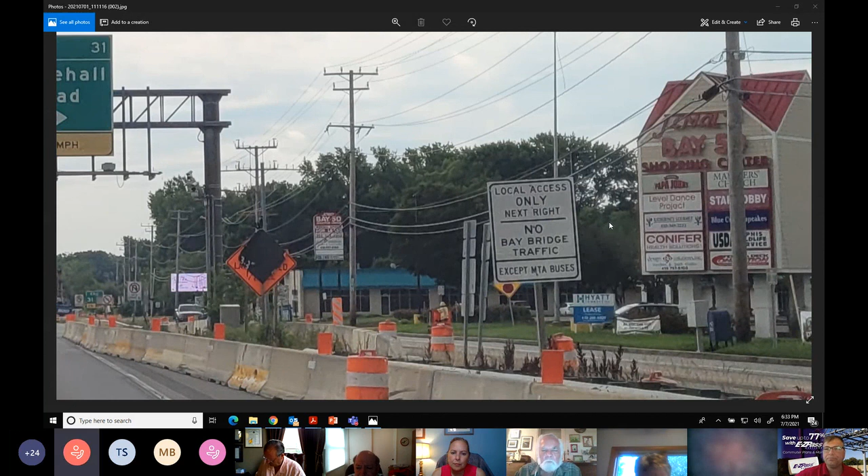Okay, anybody else? Delegate, you have your hand up? Yeah, just adding on to that, it's correct, by the time they get to that signage they're usually already on the side roads. But we previously had the temporary electronic signs before Baydale Drive. We actually had them back to the overpass previously, and I do think that they helped keep people on Route 50.

Okay, yeah, agreed. I do believe that my list still has them out as deployed, so I need to double check with my teams. I still have them out as deployed assets that we activate for our Eastern Shore traffic operations, so those messages should be out. I don't have anything to the contrary that they're not, but I'll double check to make sure those messages are going out.

Thank you. Yes, Will, Jack here. I would say, man, the more you can put out signs the better it is. It just, I hate to say it, kind of bombard the traffic because they want to ignore those things. You know, that little sign on the side of the road, I don't think that has much effect. I think the larger electronic signs, the more there are, the better they are, man. I mean, it's a little bit, but it could help.

They've completed some of the foundations and also completed demolition of the old toll plaza. Upcoming work will be continuing that trenching and boring to complete the work along Whitehall, College Parkway, and US 50. They'll also continue drilling the caissons and pouring the gantry foundations.

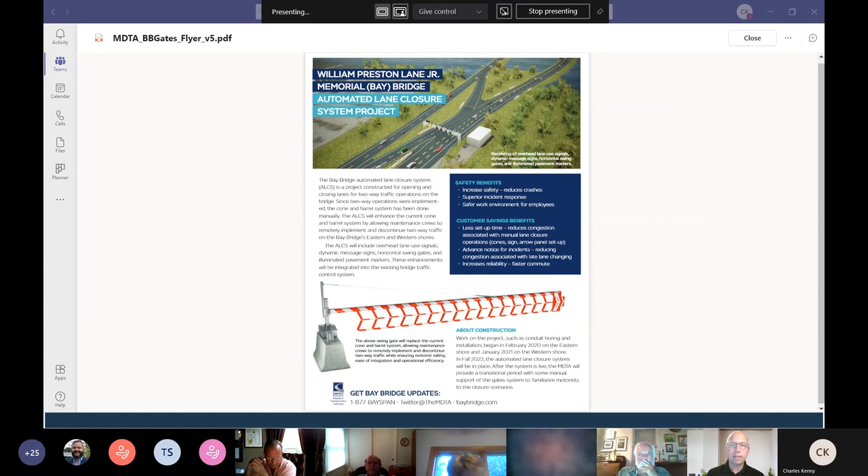That work is utilizing some off-peak lane closures, mostly along US 50, trying to work behind from the shoulder, not trying to have any lane closures. On Whitehall and College Parkway, they are utilizing daytime flagging operations to allow them to perform work in the daytime from those side roads.

Jim, I just wanted to point out we had sent around the Gates flyer that posted to the web under that project, which is shown on the screen as well, on the social media and web pages. We sent it also to the BRAG members today. Right, that's for both 3008 and 3014.

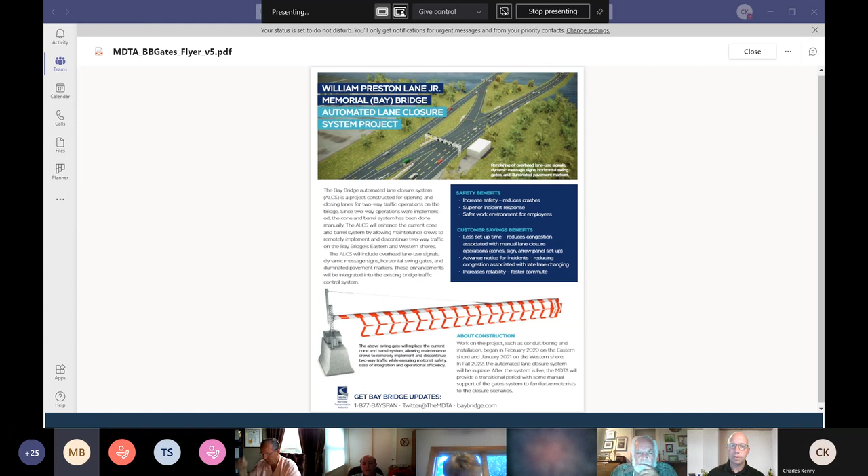Our next project, which is the one project we have in procurement, is BB 3013R. That was the replacement contract for BB 3002. So that's our new on-call contract that will again allow us to address priority defects from our inspection findings. That project is expected to receive notice to proceed this August, so we should have that online soon.

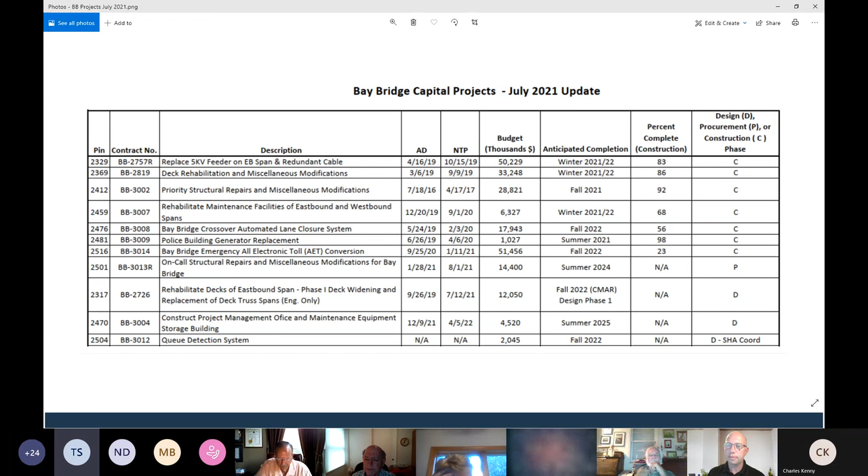Great, thank you very much, Mr. Chair. Appreciate it, and appreciate being able to give an update to the BRAG today on our efforts. MDOT SHA is heavily involved. I'm here for Administrator Tim Smith, who's on leave this week.

We're right in the middle of our Eastern Shore Traffic Operations Program, which deploys our resources heavily on Fridays, Saturdays, and Sundays on the Eastern and Western Shores to proactively patrol with our emergency patrol units, monitor our ITS, our Intelligent Transportation Systems devices, and filter information while working with the Maryland Transportation Authority and other credible sources that are calling in incidents, breakdowns, disabled motorists, lane disrupting incidents when they occur, to alert motorists with traveler information on our overhead signs and our portable changeable message signs, and things that affect traffic flow, and get motorists that are in need of assistance moving along quickly and rapidly.

One of the things we've seen this year is some changes in trends of travel. Just recently, we started noticing some changes in Thursday travels. So we started adding some resources to Thursday afternoons and additional patrols to the US 50 corridor through Annapolis for some of the congestion we've been seeing, in an effort to help mitigate those things when they occur, so that we can be readily prepared with resources and quickly clear and respond to incidents when they occur, and provide that traffic management, detour resources, or assistance when those events occur.

And I'm going to kick things off. I guess, Melissa, will you be projecting the presentation? Okay, I'm going to kick things off, and then Jim Harkness will follow shortly thereafter to give some additional background.

So as several had mentioned during this meeting, this summer has been really challenging with both weekday and weekend periods with simultaneous delays at the Bay Bridge. At the last meeting, we noted that there were some historical traffic analysis available to the public and the BRAG members, including the 2015 life cycle cost analysis, or what's referred to as the LCCA. We wanted to go over some of that to address some of the community concerns about traffic, and we hope it will provide some background on the recent traffic stats and perspectives related to those stats on what the BRAG members and the MDTA should expect in the future based on the prior studies that we've done.

So you'll note on the screen that the life cycle cost analysis that was completed evaluated between Maryland 70 Rowe Boulevard and US 50 301 split. Next slide, please.

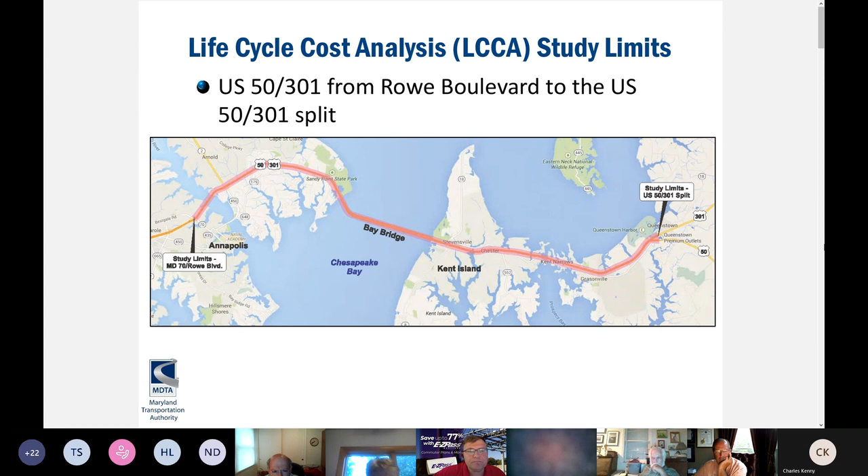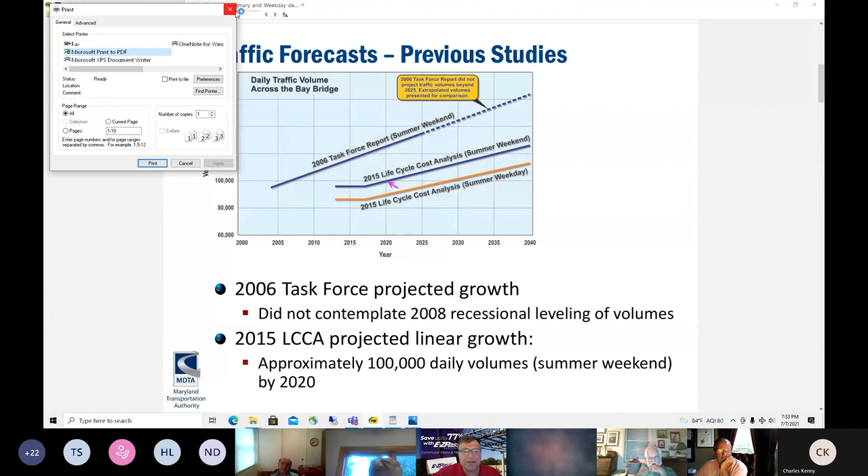So as many of you are aware, there have been a number of studies completed over the years which have evaluated and forecasted the traffic at the Bay Bridges, including over multiple different administrations. The 2006 report projected a linear traffic growth, but it did not contemplate the temporary decline in traffic volumes that we observed during the recession period in the late 2000s. The 2015 LCCA report was based on 2013 traffic data and similarly projected linear growth, but that growth was with a more conservative growth rate and incorporated the recessional traffic impacts that we had experienced. The 2015 report projected daily volumes in the summertime of approximately 100,000 vehicles by 2020.

And obviously with the pandemic, we had lower traffic volumes than that experienced in 2020. But as you'll see in the next few slides, the traffic information in 2021 is kind of right in line with what we expected and had predicted in 2021. So next slide, please.

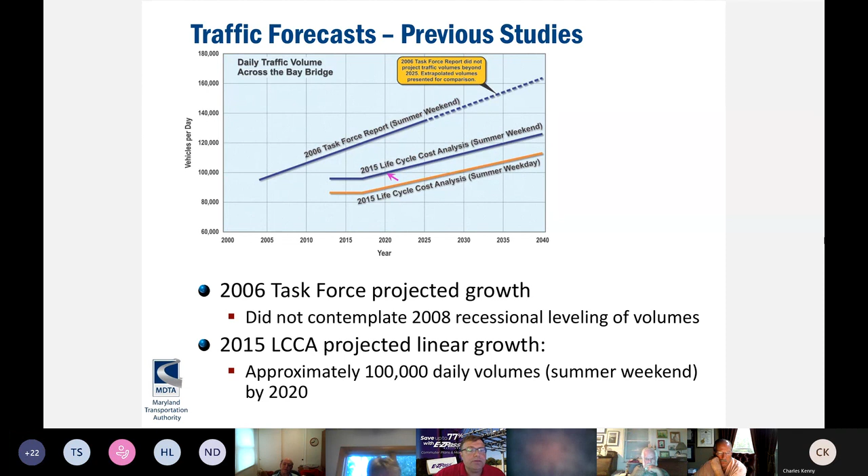I appreciate Mr. Coates' comment earlier today about traffic at the Bay Bridge being difficult for as long as he can remember. That said, we're seeing some really high volumes and in certain cases unprecedented volumes here in 2021. You can see that the 2021 actual volumes for the fourth week of June were frequently the highest we had ever experienced for this week in prior years. Additionally, the total volumes were near that 100,000 vehicles mark that we had predicted in the life cycle cost analysis. Next slide, please.

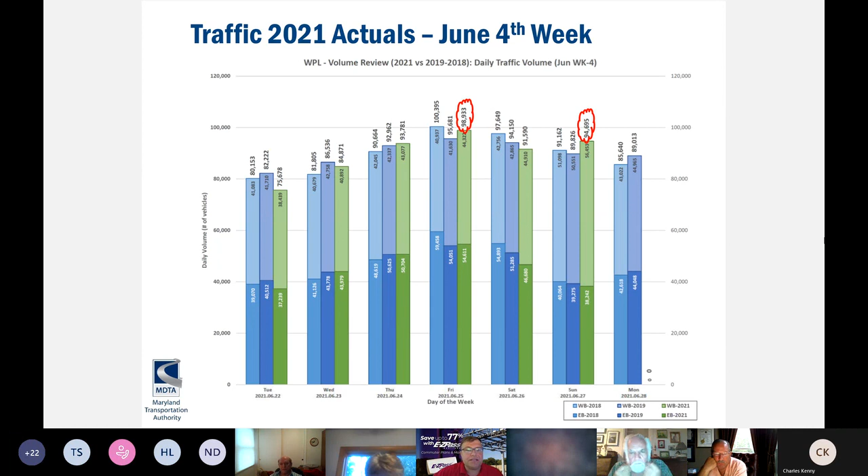We are hearing the community's frustrations with the simultaneous eastbound and westbound delays, with specific calls to alternate the two-way operation for whatever direction favors the delays experienced. However, it's important to note for the BRAG and MDTA that we need your help managing community and motorist expectations, as two-way operations will not adequately manage these simultaneous delays that we are experiencing and will increasingly experience over time. Significant delays during the summer in both directions concurrently will occur.

The traffic operational improvements that we've done and are doing, like the implementation of all electronic tolling and the automated lane closure system, will not address the congestion that is fundamentally caused by inadequate lane capacity on the bridge. There's simply too many cars for the number of lanes.

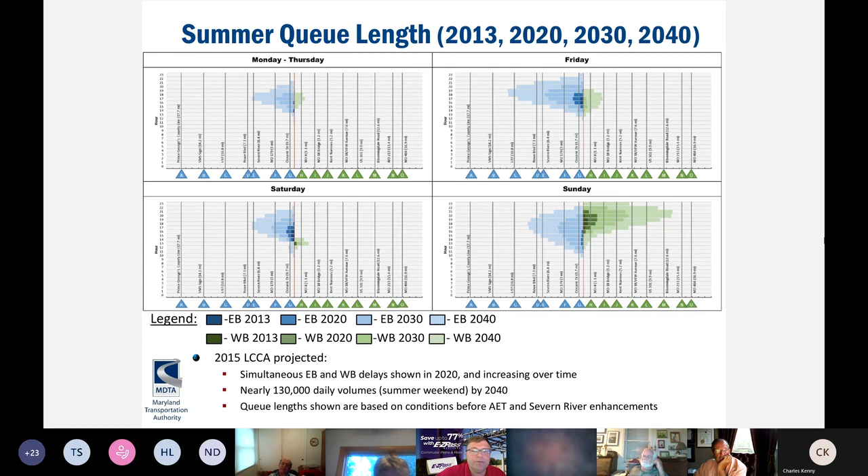I already talked about the lengths of backups we're experiencing and expecting, but it's important to also note that these backups are based on average conditions in the life cycle report. They exclude incidents, inclement weather, construction operations, special events, and holidays. Furthermore, we're seeing the spreading of traffic both during the week and in the fall and spring periods.

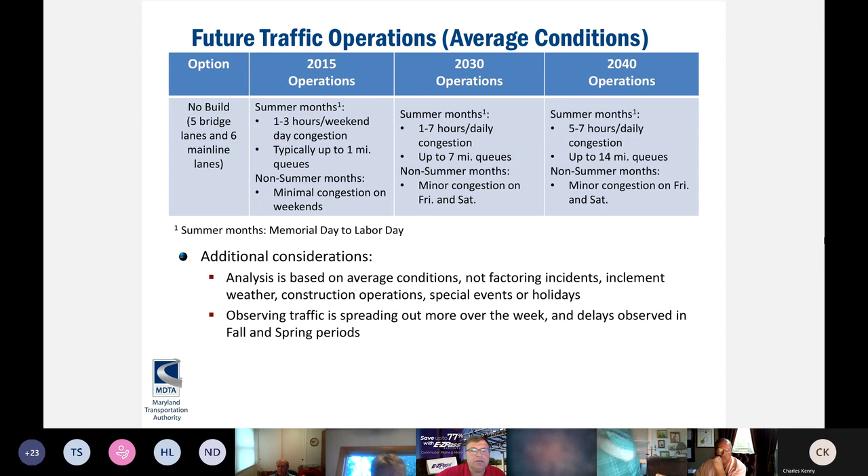Lastly, before I turn it over to Jim Harkness, the life cycle cost analysis projected that there would be major projects needed to keep the existing bridges in service, totaling nearly $3 billion. The existing bridges were originally designed for a 50-year life, with the eastbound bridge nearly 70 years old and the westbound bridge nearly 50 years old. Servicing the maintenance and traffic needs is becoming increasingly challenging as the bridges age beyond their original design intent.

Given the age of the bridges, and to keep them safe and open to traffic, we expect a near constant state of necessary construction. Additionally, the life cycle cost analysis notes that future projects on the existing bridges will likely necessitate partial bridge closures, including during peak periods, and potential long-term lane closures. With community objections to even minor lane reductions and the current shoulder closures, the practical feasibility of more extensive rehabilitation and maintenance projects necessary to extend the bridge life is very uncertain.

It will become increasingly important for the members of the BRAG to help share with the community the realities of the lane capacity inadequacies, as normal and work zone traffic concerns apply increasing demand on the management of the bridge. I'm going to turn it over in a moment to Jim to talk about some of the experiences we've been having during the weekdays, but I'm happy to take any questions on the slides I've presented so far.

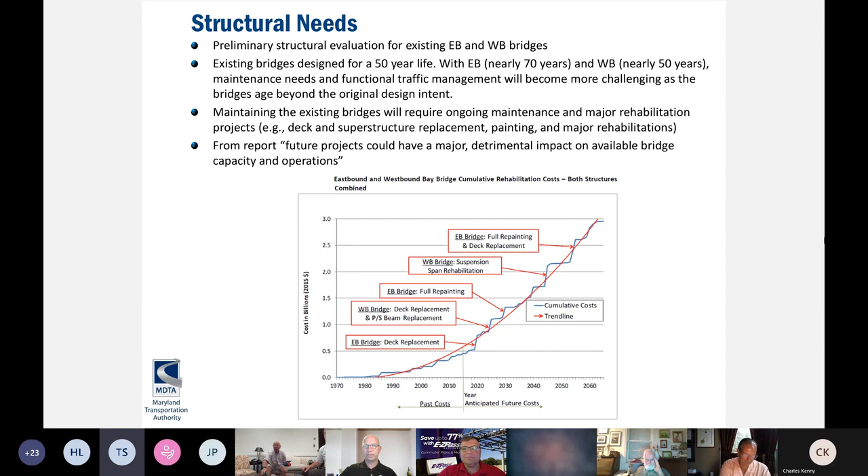I want to mention one more thing. In the communities near the Chesapeake Bay, we've been focused on a NEPA solution that would take traffic surge away from south central Anne Arundel County and move it north or south, like to Cambridge. We're hoping for another bay crossing in either direction. However, when we looked at the actual mandate, and saw Jim's report that these bridges currently in operation had a lifespan of 50 years, and realized how far over capacity they are now, with the '52 model almost 20 years beyond capacity, suddenly for many of us the focus changed entirely—we now have a mandatory requirement to look at a replacement bridge.

Jim Ports brought this up at a recent public radio broadcast—we have to replace this bridge. The question is when. For many of us, that has overcome our consideration of a north or south crossing to take traffic away from where we live with these mounds of traffic every weekend, and now during the week too, as MDTA has correctly forecasted. So right now our focus is on the replacement bridge.

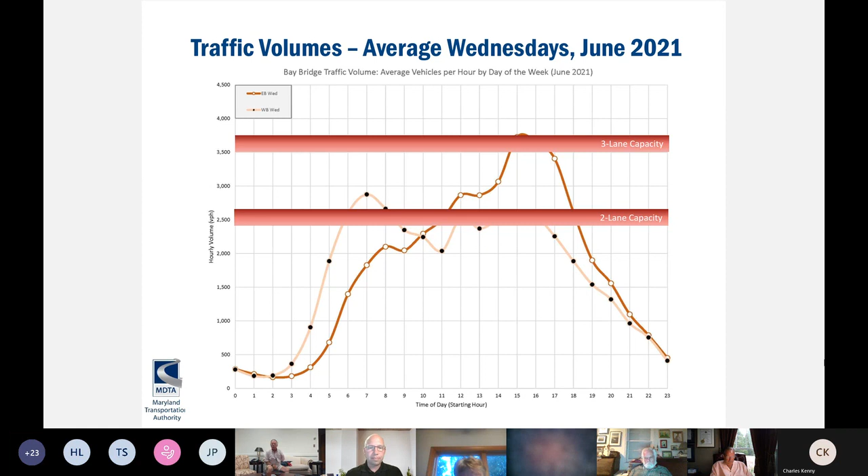As you continue to move into the evening hours, the demand volumes dip below that 2-lane capacity, and any kind of residual queuing will clear. So with the next slide, I'll just walk through some of those time periods. Again, this is average Wednesdays.

The first 2 Wednesdays of this June were pretty close, maybe slightly less than years past, in terms of the volumes in either direction. But the last 3 Wednesdays, as Will showed in his graphics, we saw volumes that equaled or exceeded years past. So when we combine them all together, the impacts don't show up quite as well, but they are still notable.

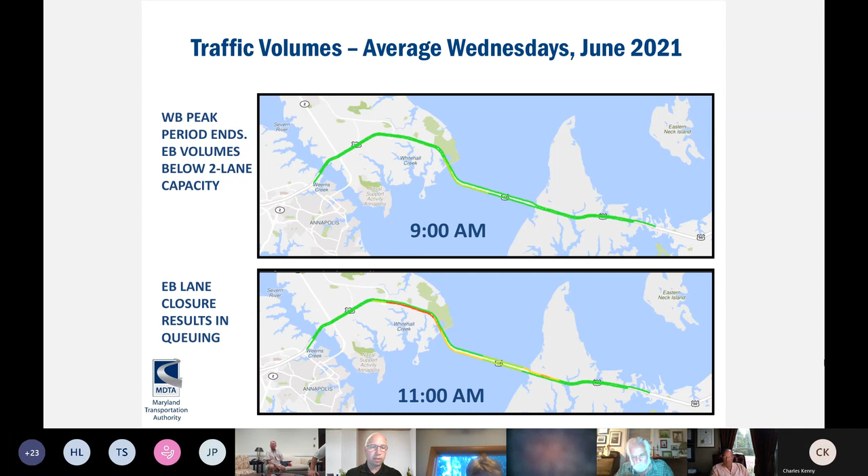Moving into the next slide, in this 3 p.m. hour, we were approaching - we've removed the lane closure, no work going on, just into the traffic operations, traffic management here. So we have 3-lane capacity heading eastbound, and westbound we have just the 2 lanes to service that.

Again, we see some slowing on both approaches because, as shown in the original first chart, both eastbound and westbound in this early afternoon, we're approaching our capacity. So the demand from both directions were right at or exceeding the limit of our capacity. You see that represented here by the colors showing slowing, reduced speeds.

And then as we move to the bottom again, by that 5 o'clock hour, volumes have decreased. We're below the 2-lane capacity thresholds, and so queues are all but gone except for on the bridge itself.

So we just wanted to depict for you visually what we've been noticing in our data, and I think essentially we've been reactive to the management on this. As I said, the first 2 Wednesdays the volumes were lower than in prior years, and we didn't go into 2-way operations until the afternoon.

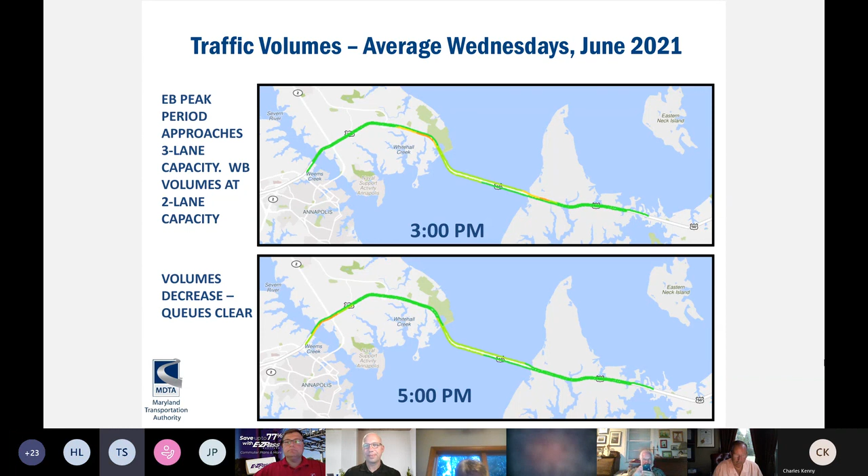Okay, so we're going to go into our next agenda item, concerns with the 511 response times and operation of traffic cameras at the Bay Bridge. Melissa, do you know who's supposed to take over that?

So, Tracy, in relation to the 511 service, I'll cover that briefly. The 511 service is directly tied into the chart system, so when we put out updates through chart, it's automatically updated within the 511 system. The baseband system is separate from 511 and has a different updating process, so we have to manage those systems concurrently. As Jim Ports mentioned earlier, that also coincides with updates we're doing through Facebook, Twitter, and the Gov delivery system. So there's multiple venues we have to keep current.

Sometimes in the process there could be a 30-second lag between when the baseband update goes through and when the 511 catches up, because the staff in our authority operations center that enter the information have to do one system at a time, and they are separate systems. So we're not exactly sure what the issue was with 511, but Jim Harkness mentioned the cameras and the gantry upgrade during his presentation, and he has one slide to show some details there.

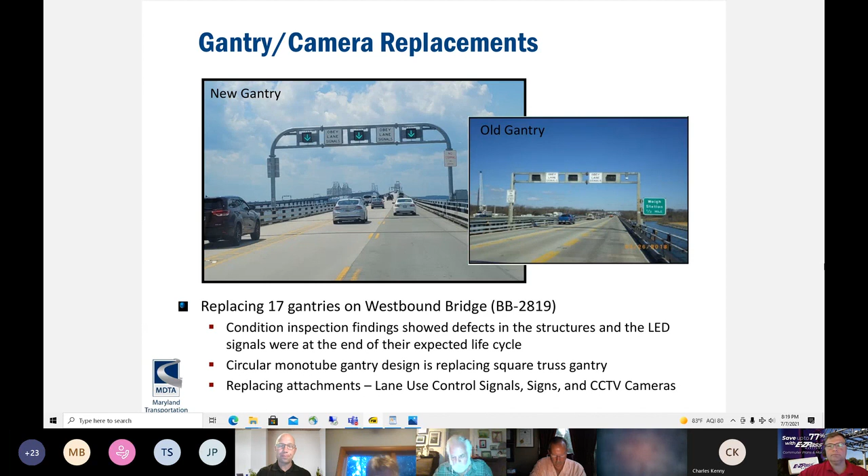Seeing no questions, we'll move on to the next item. There's a tolling recommendation from Vice Chairman Hitchens concerning inquiries received from one of our community members. Barbara, you want to make a comment on that?

Yes, we've had tolling on one of our previous agendas, and when I received an email from one of the people in my contact groups, it was brought up that since the Delaware bypass has opened, a lot of people are using it because their cost is so much lower than 95. So they're coming down 301 or going up 301. It's $4 to use the bypass, and on the bridge $2.50.

Versus $10 and something coming by way of 95. So perhaps it's something that this group needs to revisit to see whether or not we can make any recommendations. Some suggestions were to pay toll both ways on the bridge, to increase the toll fare — I know Governor Hogan reduced it, and I don't know if this could be recommended or brought into consideration. Also to talk about variable tolling during the summer months. I don't know whether it's worthwhile for this group to recommend that the Bay Bridge tolls be studied to see if changes should be made to help with traffic flow control. I'd like to hear your opinions, or if you think it's worthwhile for us to pursue.